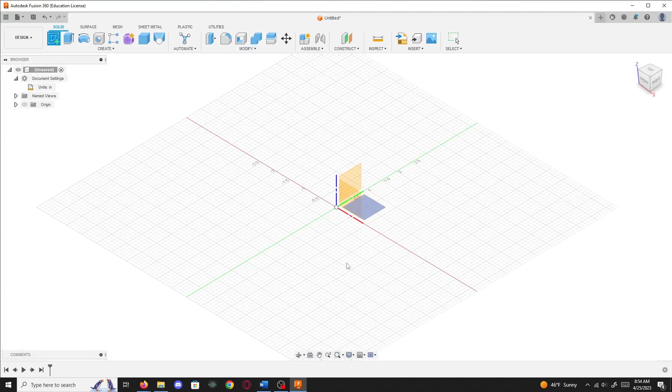The first thing I want to do is open my document settings, hover over units, and click. That opens this dialog box, and I'm going to change it to inches. If people are comfortable working in millimeters or other units, that's fine, but I tend to think through cabinets in inches more easily, and that's what I have the directions set up as.

So once I have my units as inches, I start my first sketch. I usually come over here and select this so I can pick the plane I'll be drawing on. To make sure I'm looking down on it, I check the view cube and see it says top, meaning I'm looking straight down.

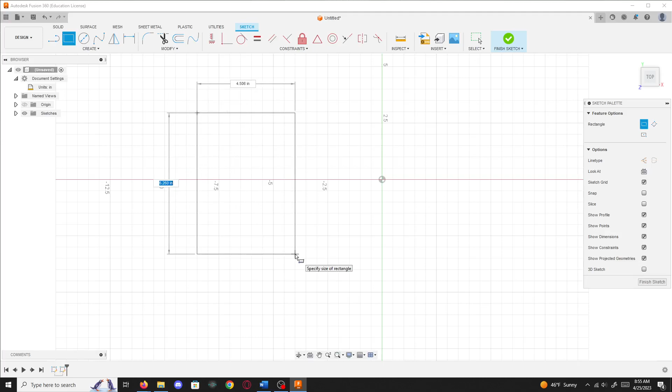First step is to create a 2-point rectangle. If you don't see the button up there, it's in the drop down menu. I click, move my mouse, and I want this first rectangle to be 23 inches deep. I hit tab to move to the left side and make that 23, then hit tab again and make it 32. Now I have a rectangle that is 23 by 32 inches.

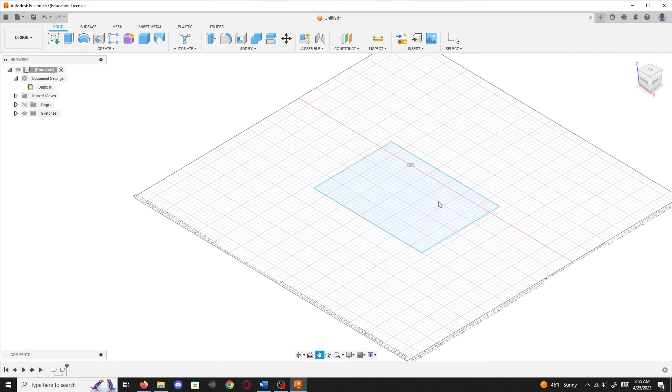If I move my mouse around, it changes where it places the rectangle. I want it right here, so I place it, and for this step we finish the sketch. I'll come over by the view cube and click the home button, so now I'm looking at it from the home view.

Next step is to extrude it. I am going to make this 36 inches tall, and for now I'll turn it into a new component. Then I say okay, and here I have a big old block.

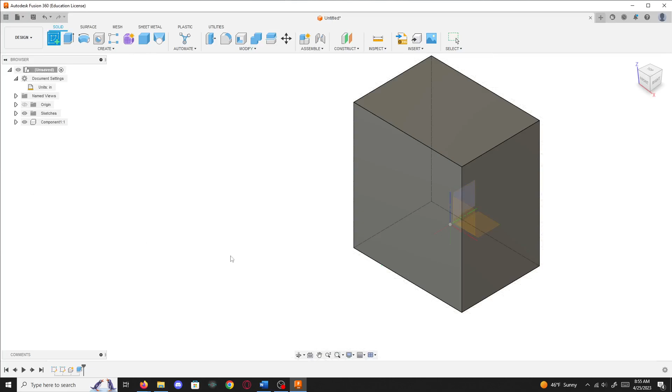I will create another sketch, and this time I need to click directly on the face of the extrusion I just made. So I click there, and I want to make a couple more rectangles. I'll come over to 2-point rectangle, start in the corner, see how it snaps with the square there, click, and move it over. This X, where my mouse is, shows that it's snapping to that side.

I want this rectangle to be 4 inches tall and to snap to the side of the cabinet right there. If it won't snap to the side of the cabinet for you, you can always tell it to be the same width as your cabinet, which is 32 inches in this case.

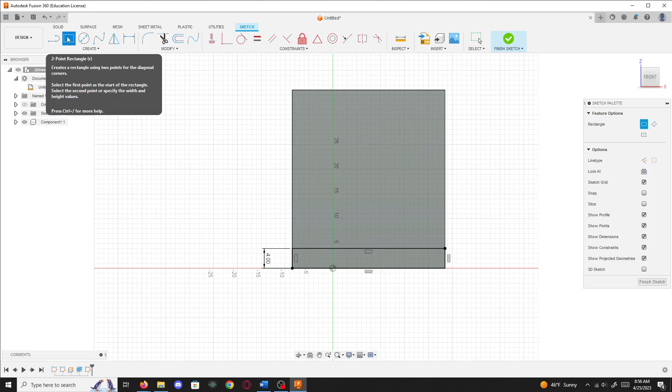I'm going to make another rectangle. My rectangle tool is already selected, so this one I will start in the top left corner and come down until it intersects with the bottom rectangle I already made. Then I click, and now we're going to use the offset tool, which is right here in modify.

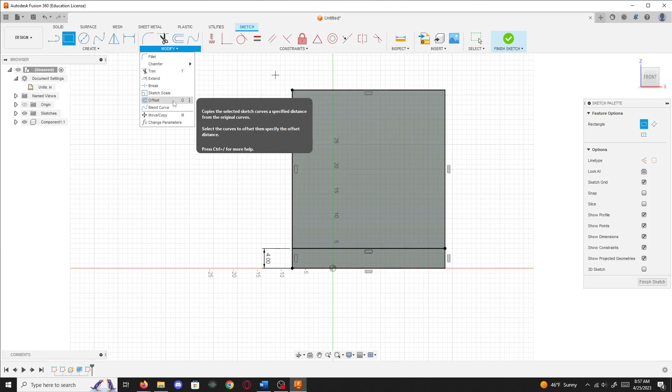If I select the modify drop down, it's also right here. You could press O on your keyboard to do it. Next step is to select the second rectangle we made, and I'm going to do 1 inch for the thickness of this section. Depending on what direction you drew your rectangle, you might have to do -1 inch, but in my case that puts the new rectangle outside, so mine needs to be just 1 inch right there.

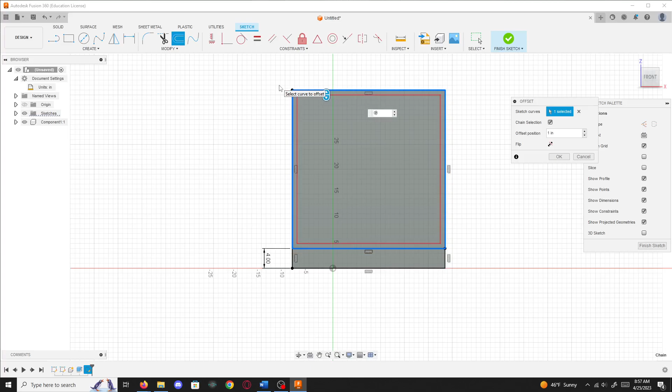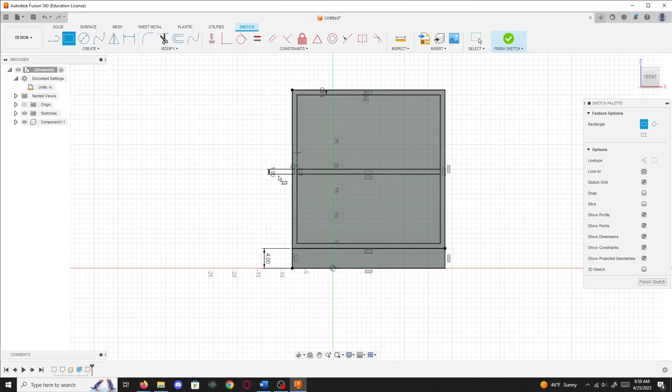I'll hit enter to place the rectangle, and I'm going to create my last rectangle for this cabinet. 2-point rectangle. It doesn't really matter where I put it here, so I'll go to the midpoint, just because that gives you a chance to see the triangle that appears when you snap to the midpoint. I click to start my rectangle, come across until I get my X showing I'm snapping to it, and I'll make this 1 inch as well, click to place it, and all my sketches for this cabinet are done for now.

Finish the sketch, and it automatically went to the home view for me. If you want to get back to the home view, it's this little house right here.

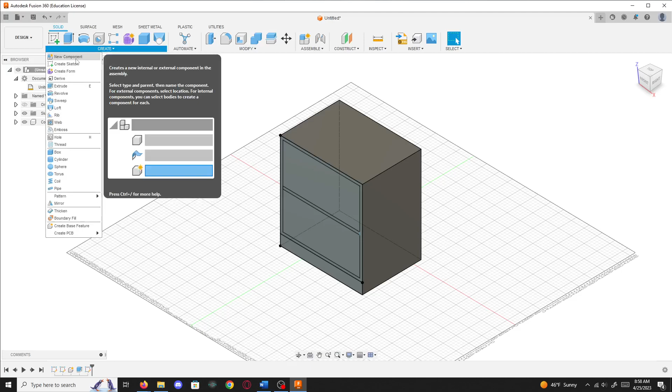The next step we need to do is cut into our cabinet using the extrude tool, the same tool we used to do the first one. If you don't see it right here, it will be in your drop down menu, or you can press E on your keyboard.

Start with this bottom rectangle. We're making the toe kick, and you click on the face. I put in -3, and that subtracts the material 3 inches into it.

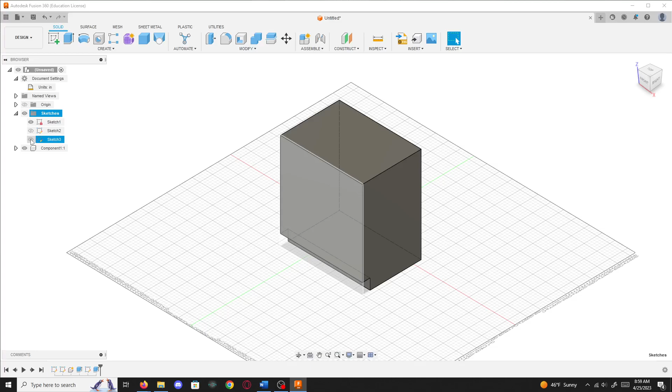As you can see, the other rectangles on the face of this disappeared, so we have to turn our sketch back on. Come over here into your browser area, down to sketches, click the arrow next to it, and find the sketch that we need, which is this one, and hit that little eyeball right there to turn it back on.

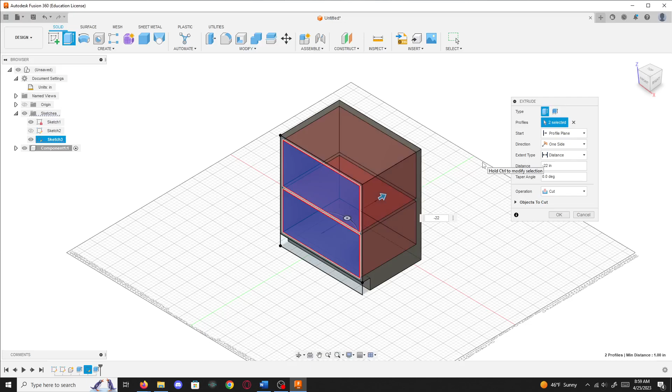We're gonna do another extrusion. Select this upper rectangle inside, and then select this one at the same time, and do minus 22 inches. That way we have an inch all the way around on the sides, an inch for our shelf, and an inch in the back. Hit enter, and we can hide that sketch again.

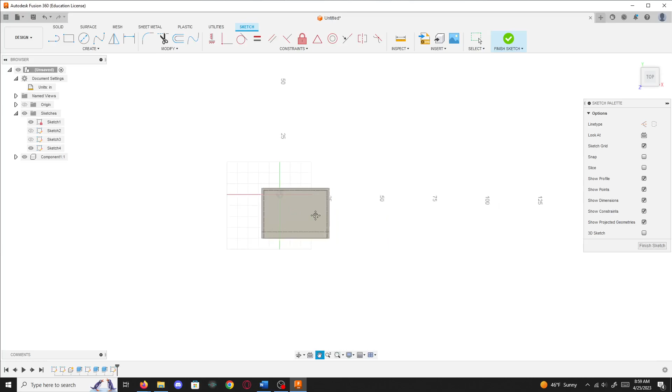So here we have our first base cabinet. Now we're gonna make our upper cabinet. So yet again, we create our sketch, place it so that I'm looking down from the top view, start a new rectangle. I will put it right here. This rectangle is gonna be 11 inches deep and 32 inches wide. So the size is now defined because I hit tab and put the numbers in, and I click my mouse to place it.

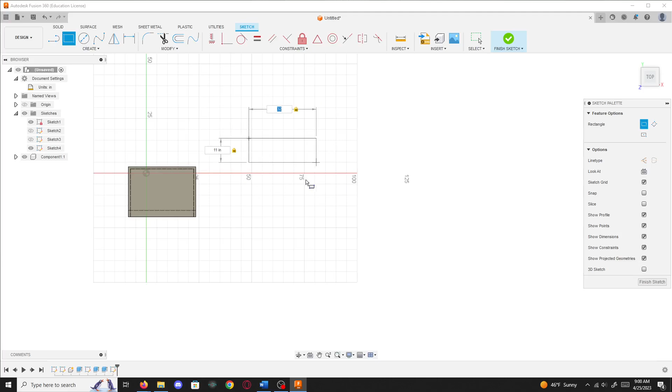Again, finish the sketch. Extrude the rectangle. I will make this one 36 inches tall, and I'll call it a component because then I can do more stuff with it in the future. Say okay.

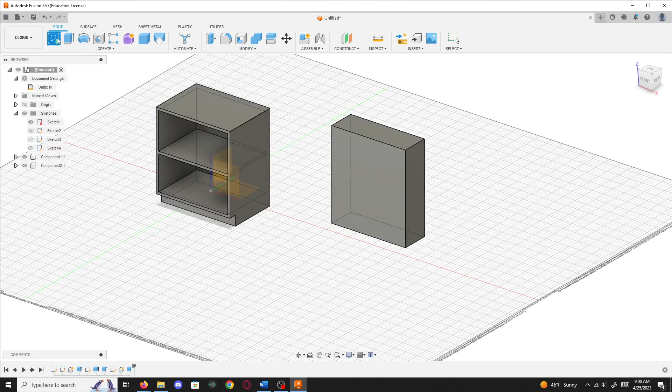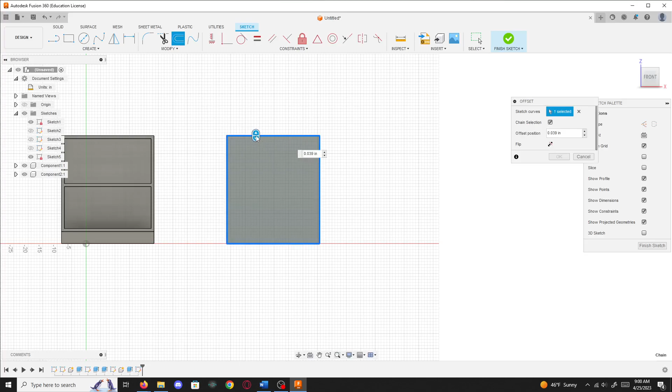Here we're going to create a sketch on the face of this upper cabinet, just like the last one. This one we don't need a toe kick though, because it's not going to be on the floor. So all I need to do is find my offset tool. If it's not here, we can do it in the drop down menu or hit O on your keyboard. Click this and haha, so if I push 1 on this cabinet it goes outside of it, so I have to do -1. There it is. Hit enter.

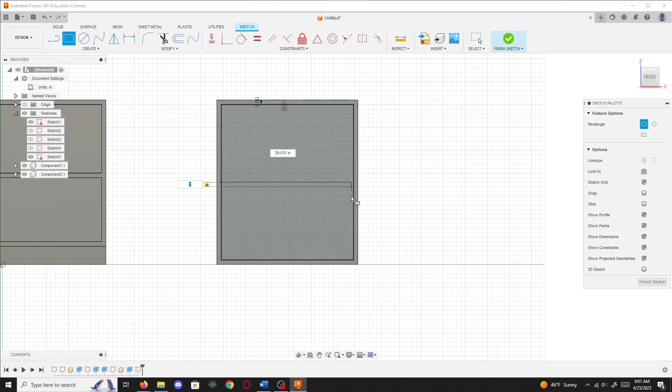Let's put a shelf in here like we did on the last cabinet. I'll snap to the middle again. Come over till I get my X. Do 1 inch and come on. There we go, there's the X.

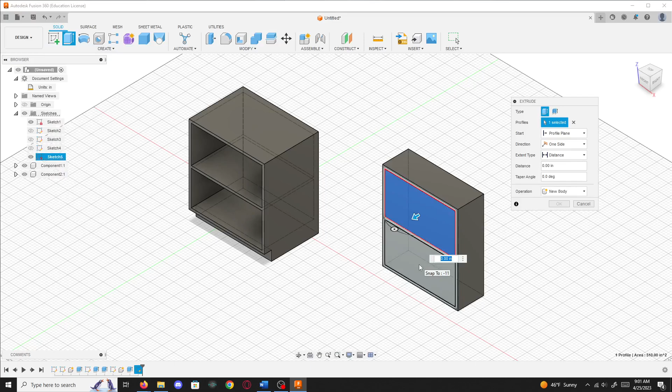Okay, finish this sketch and go to the home view. We're going to extrude again. Tools right here, or it's in your drop down menu, or press E on your keyboard. I'm going to click this and this. Since this cabinet is 11 inches deep, I'm going to go with -10, gives me 1 inch all the way around. Hit enter, and I have my basic open upper cabinet.

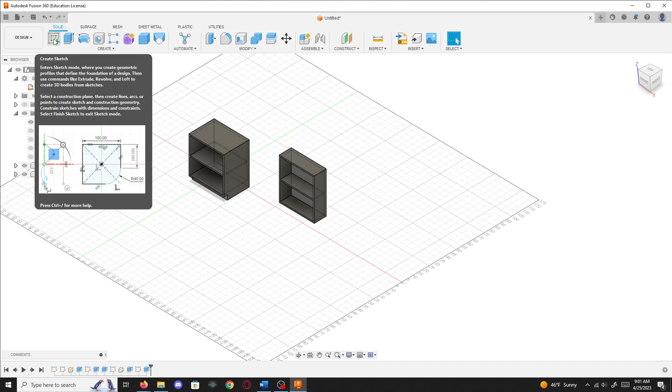The third cabinet that I would like to have made is a taller cabinet. So we'll create a sketch again. I'll click right there so I'm looking down. 2-point rectangle, and we're going with 32 wide.

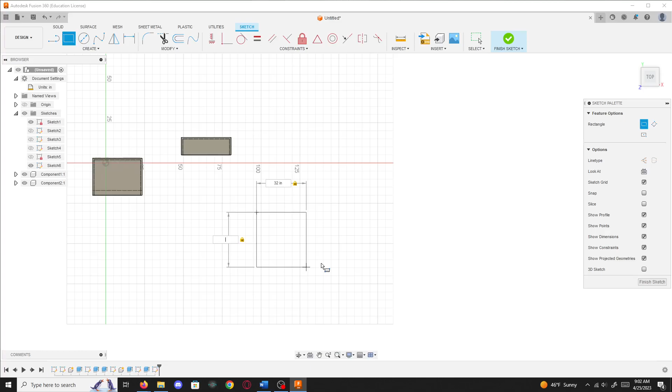This one is, I'll make it... 34 deep. No, 23 deep. 23 deep. Hit enter, I have my rectangle.

Finish the sketch. Now this one I'll extrude to 72 inches tall. I just typed 72 on my keyboard. It was already selected. I'll change it to a component. Say okay. Create a sketch on the face of it again, right there.

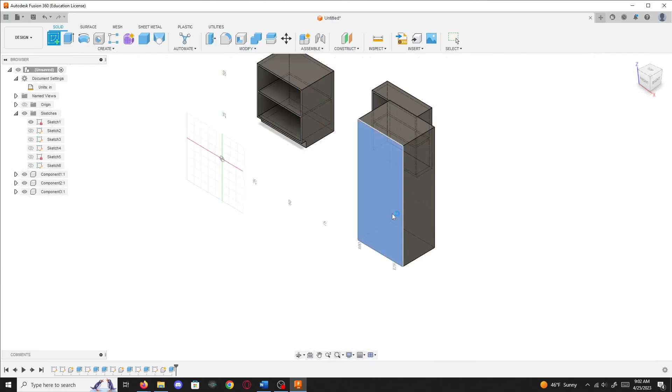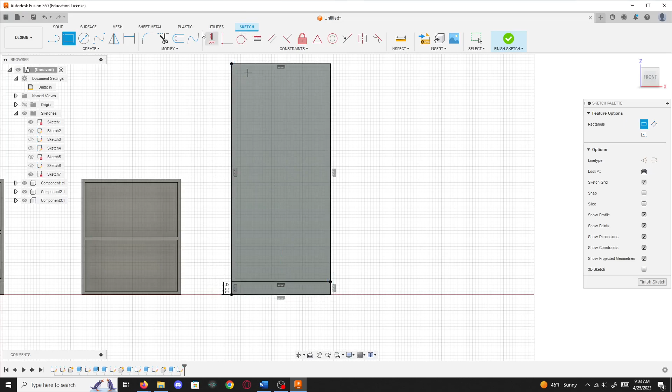This one does go to the floor, so I want to do a toe kick. Start my rectangle in the bottom corner, make it 4 inches tall, and get it to snap to the side. Right there. One more rectangle that goes here. We offset the rectangle, and 1, there we go.

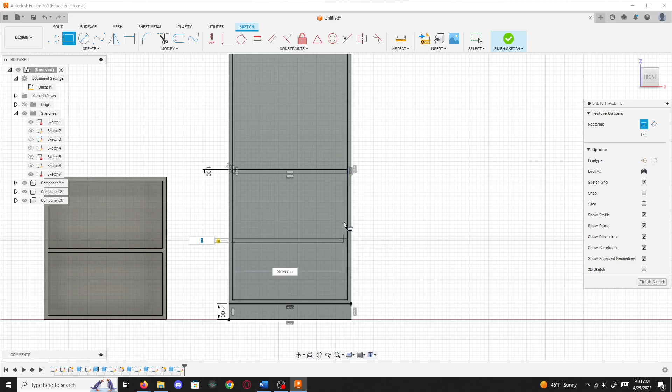Hit enter. This one I want to do a couple of shelves because it is so tall. Tab 1 and 30 inches, or snap to the side. Put another shelf here. Tab 1. Snapped, and right here. Tab 1 and snap.

One thing worth noting while we're in this space is this rectangle is black because it snapped to the midpoint. It is in a fixed location. If I adjust the height of my tall cabinet here, the shelf inside will move with it. These two rectangles are not in a fixed position, so I can click and move them around.

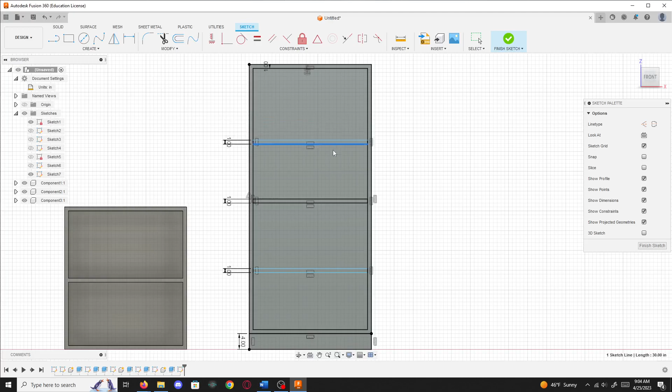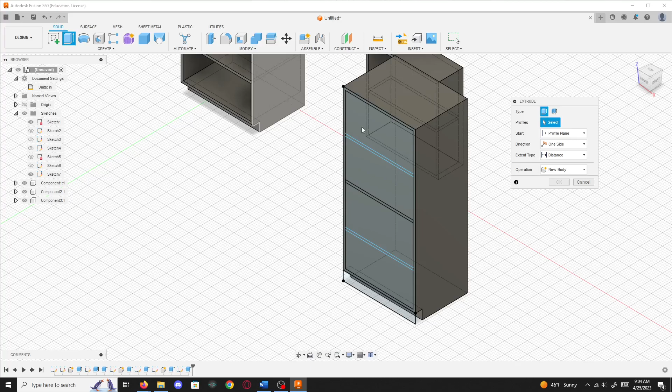Let's finish this sketch, look at it from the home view, zoom in a little, and we're going to extrude. We're going to cut using the extrude tool for the toe kick, -3. Turn our sketch back on, and we're going to extrude all 4 of these openings. to minus 22 gives us 1 inch all the way around. Hit enter or click OK, and there we go.

Lastly, something that I like to have people do is apply materials to this. Oh, we'll do mahogany, cherry. Ooh, walnut. Walnut cabinets are cool looking.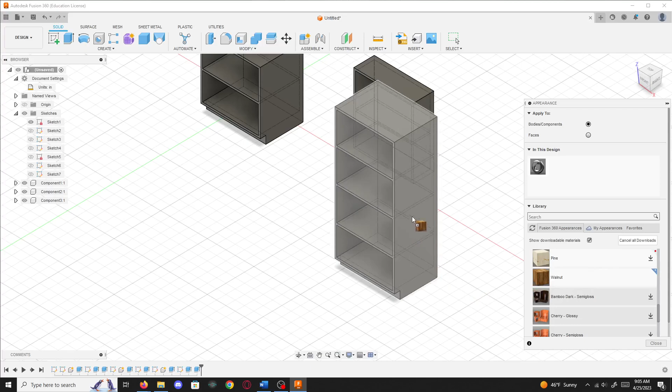So just to do that, press A on your keyboard and your appearance menu will open. You grab the one that you want if it's downloaded, click, hold, drag, and drop it onto your cabinet. And same thing here, I'll do cherry for that cabinet and mahogany for this one.